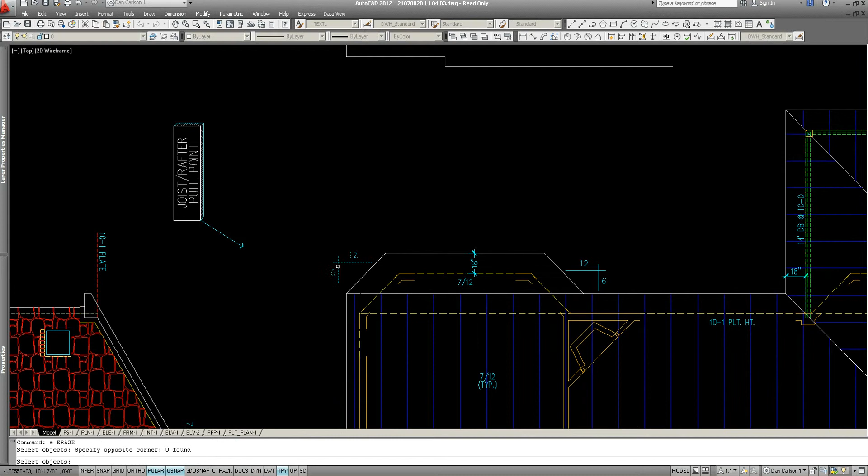And we've got a 7/12. Now I'll just give you a heads up - if you make all of the other slopes on this also a 7 and 12, it'll make it a little easier because all the lines will just be 45-degree angles. And since we get to pick how we want that to be, that's what I would do.

So here's how I would do this roof. What I would do is just take this and extend it out like this, and then we're going to pretend that instead of a bay, we actually have just a regular hip roof that's coming off the back here, and that is the shape of it right there.

And what we're going to do is just take our roof - now we know this is a gable, and that's why this overhang is 12 inches, but this right here is an overhang that is 18 inches.

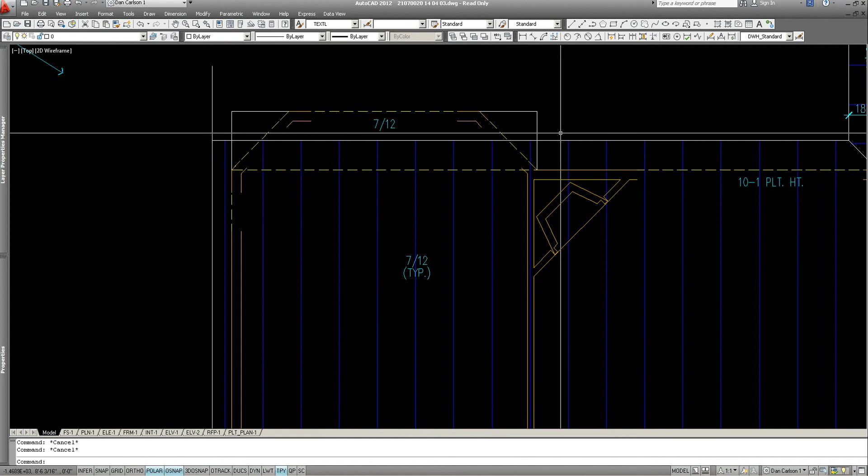So we need to make these 18 inches. I know that sounds kind of weird because this is only 12, but just go with me here for a second. So we're going to take these and offset them 18 inches - 18, 18, and 18, and then just do a fillet.

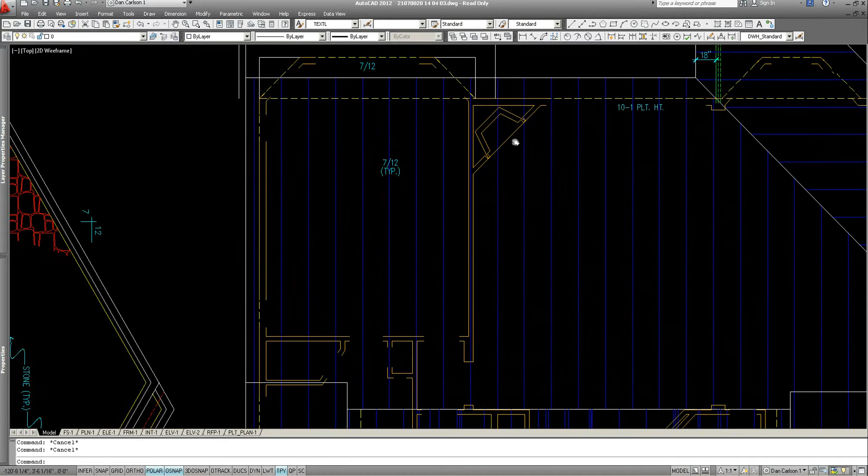Fillet. I'm wondering if you put this hatch in, but it's got to be erased anyway because it's not lining up with our joist and rafter pull point.

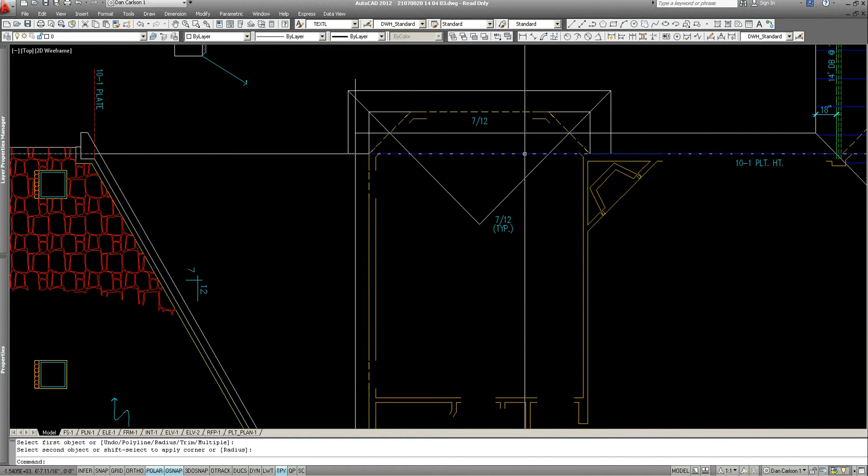Alright, so we have this, this, and this, and then even though we're going to end up with a bay window, we're still going to just go ahead and draw this as if it was just a hip roof, and then we will modify that later. And since again we said that we were going to do all of them at 7 and 12 pitches, then we just come down here like this, and then erase these, copy this to down here.

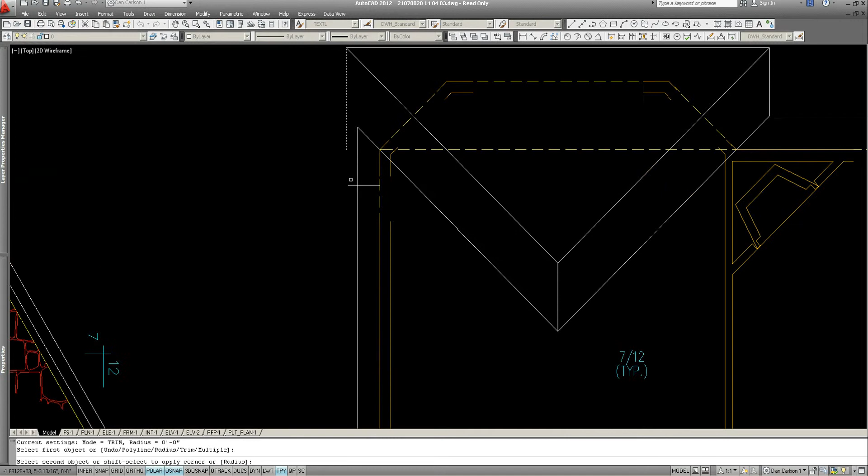Alright, and then we've got this strange thing here, and this becomes one of these little zigzag roofs that we talk about every once in a while, where this roof will come and butt in somewhere down here. This will make a little bit more sense once the exterior elevation is drawn. But in the event that we were doing a regular hip roof, this is exactly what it would look like right here.

Now, once you have that principle in place, then you know that this little spot here in the middle, its location is fixed, and these hips and valleys are also fixed. So if we want to turn this into a true bay window roof, then we take these and offset them 18 inches. I'm going to just draw a line 18.

And then mirror this over here. And then we end up with this kind of a funky thing going on, and before you start trimming out too much stuff, we have to figure out where these are all going to merge.

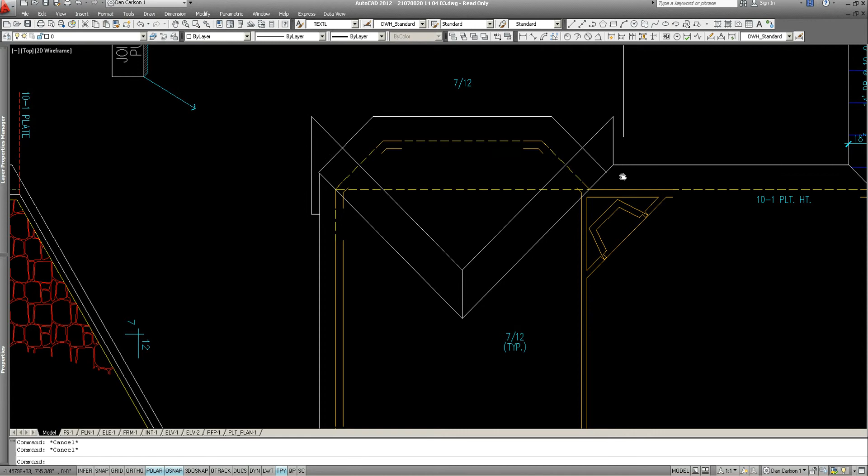So we know that these are going to merge right here. We know that, even though this doesn't line up. I get rid of all this extra stuff. And this is going to come right here, like this.

Now this would be a funky roof if we left it just like that. So what we have to do - there's two ways that you can do a bay window roof. One is just to take this all the way here. This is the most common way, and mirror that.

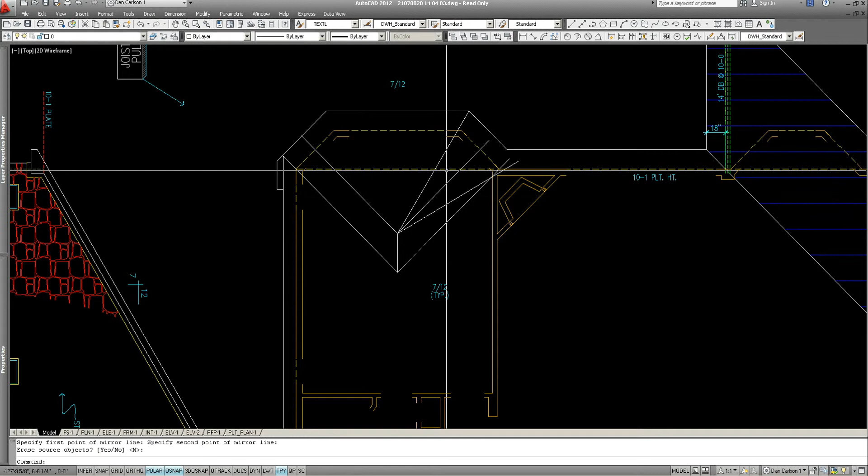This will be a 7/12, this will be a 7/12, but this will be something different. You could figure it out by figuring out your rise and run. This run here is 9'6". This run here is 10'8". So that means this will probably be something like a 6 and 12 pitch because it's less steep than this one, but that doesn't matter.

And then these two combine here, and then these end up connecting, like that.

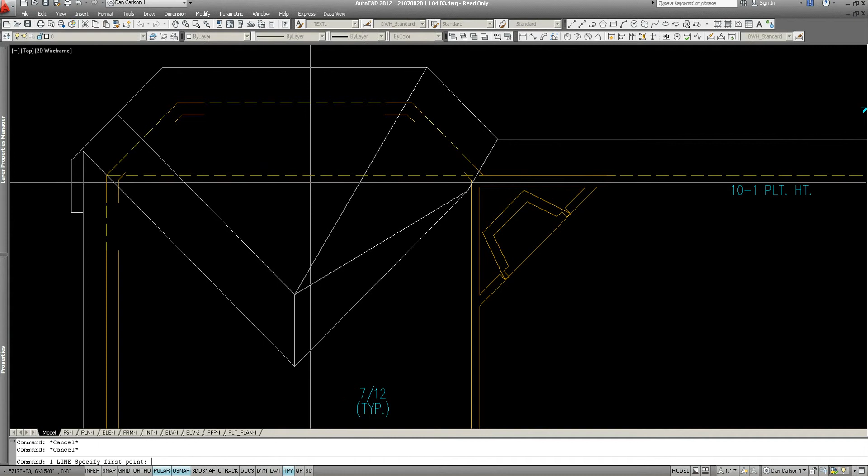You know that these two slopes should be the same, these angles, because this is a roof sloping down this way, like this, and this is a roof - whoops, I forgot the arrow - and this is a roof sloping down the same way. So these two lines are doing the exact same thing. That's why you know it worked, because even though I didn't copy the lines over, they end up being the same angle.

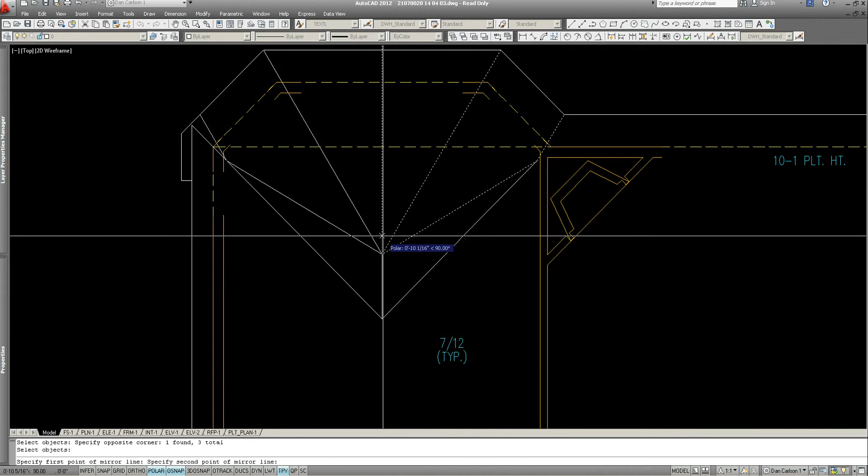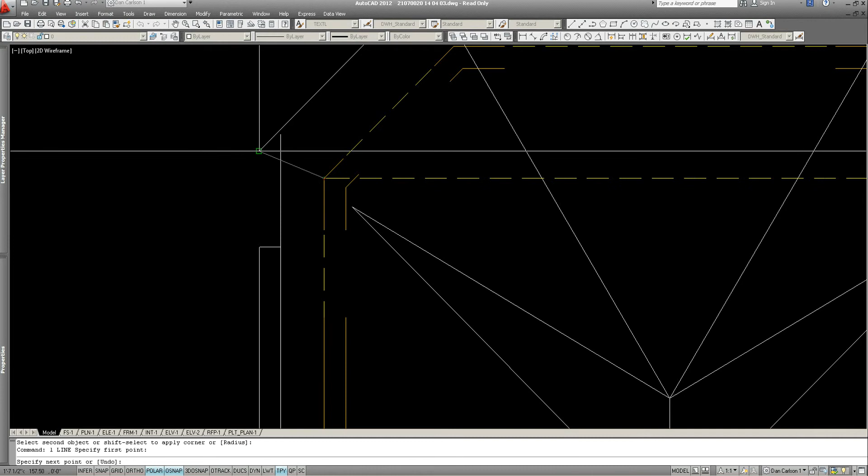Then you can just take what you've done over here and do this. The only difference being that we don't have the same little corner over here as we do on the other side. So let's see here - this would end up connect this to this, and let me think about this just for a second.

Okay, so I figured this out while I was thinking there. The reason why this matches this is because this is sloping this way, and this is sloping the same direction. But this is going to be a little bit different, because there's an area here where it wraps around. This little piece of roof here is actually sloping down this way.

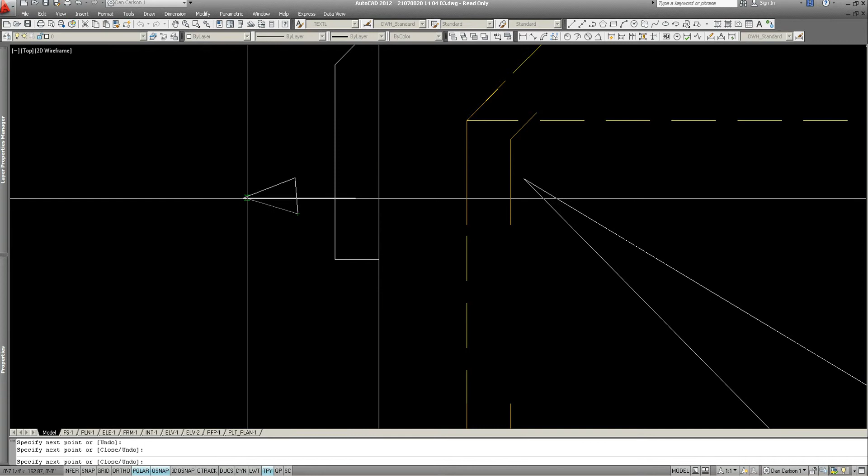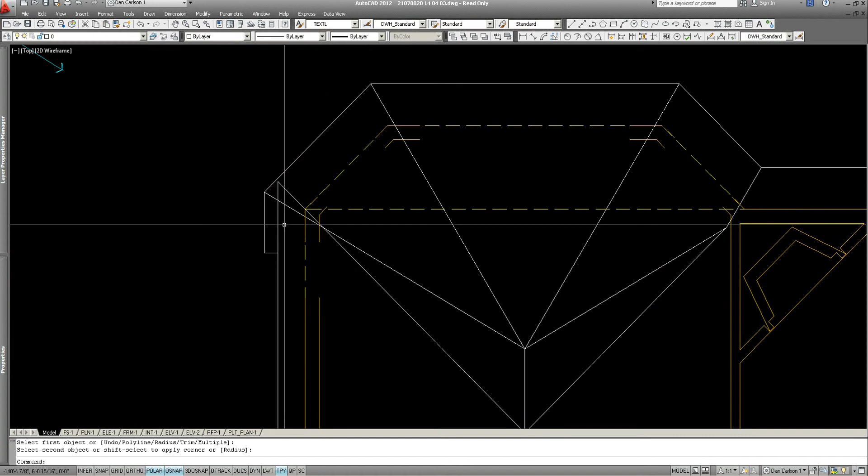That's the direction of this little roof here. So the way we figure that out is we just take this roof and mirror it at a 45. You can see how it actually ends up lining up directly with this. Then this piece of roof here technically hits this here, which gets kind of weird.

What we're going to have to do here is draw this from the side, because I'm afraid this roof is going to be too high and we'll never catch up to this roof. In other words, it'll never touch it. So we need to go over to the side elevation.

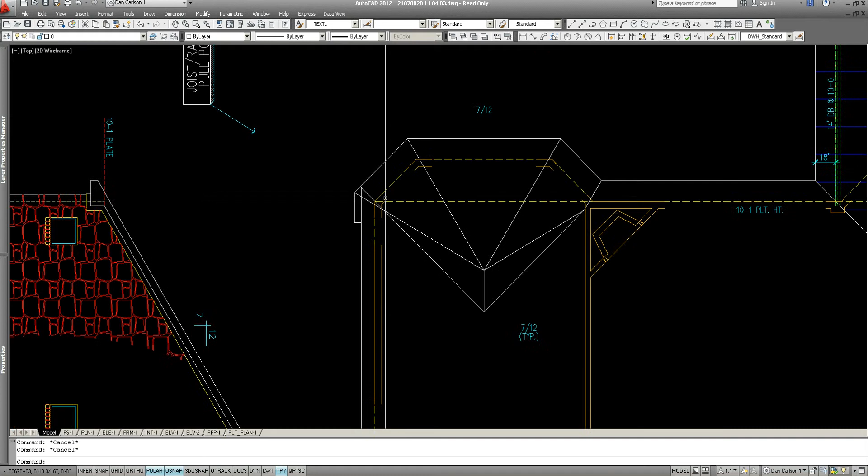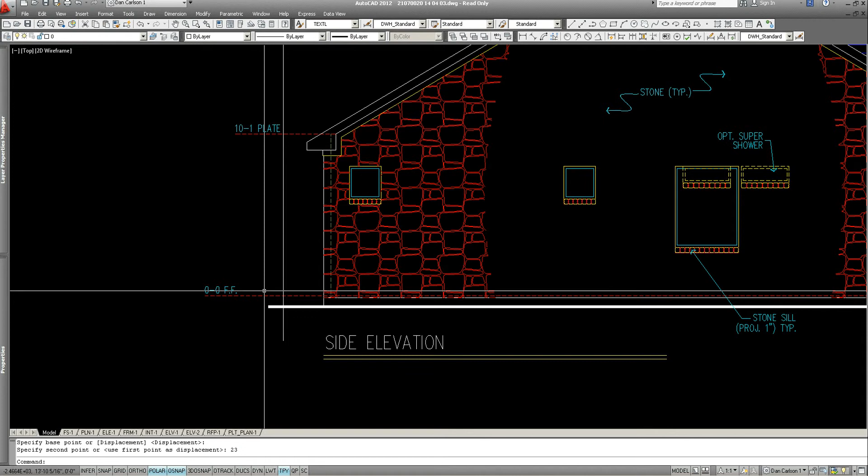So if I take this roof and spin it this way, now we've got, you can tell that this overhang lines up there, okay? And if we just draw the bay over here, and we know that this fascia board here is going to be the same height as this fascia board

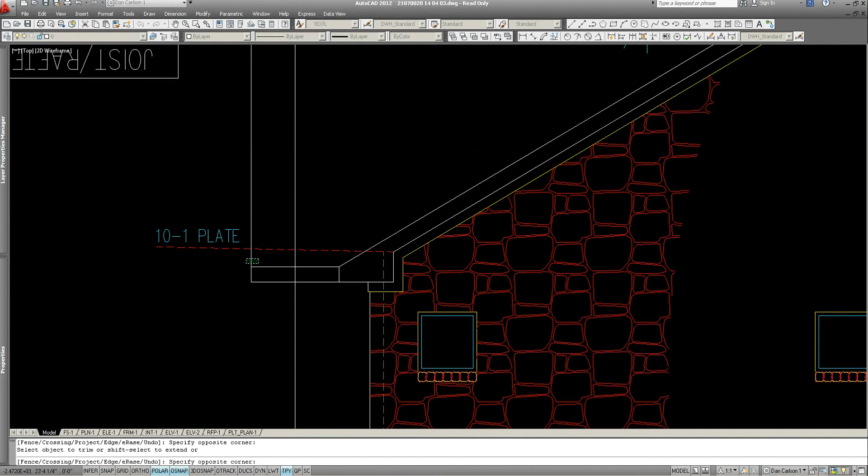here, because that was a part of the reason we left it at a 7 and 12, so that everything would line up. And then we know that this, when I draw this line, that of course is this slope here, which is actually representative of this face of the roof right here. And then it comes over here and here.

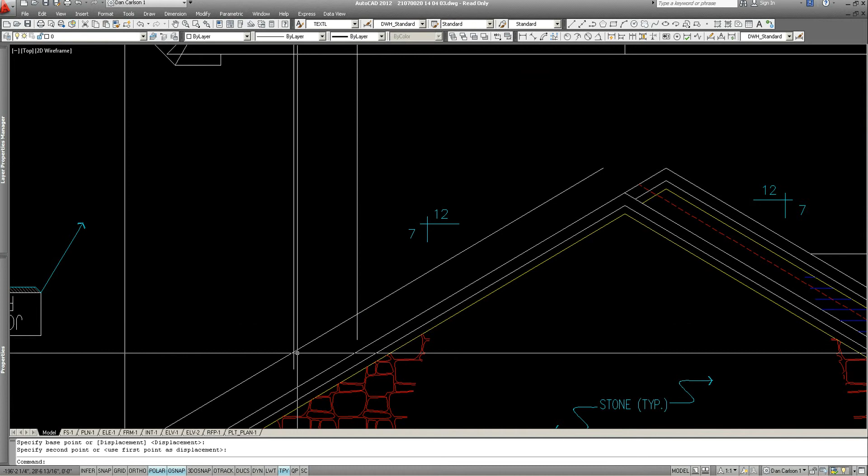And those should line up just like that. If it didn't, we would have been doing something wrong. And then this ends up hitting right here, like that.

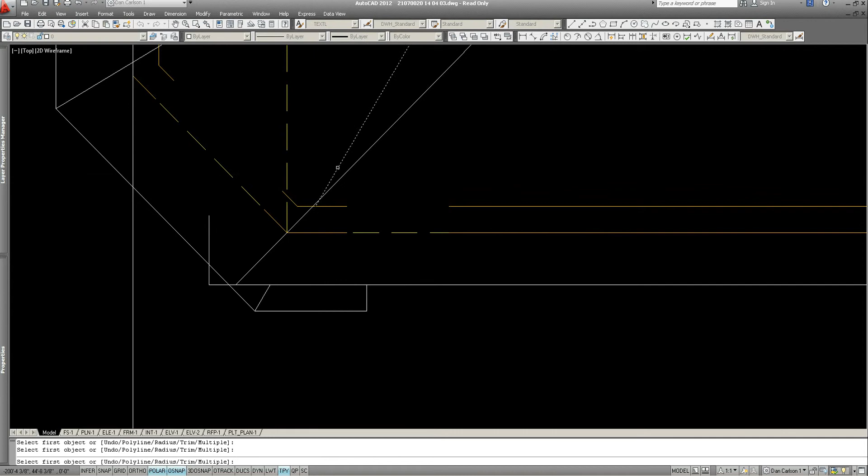And I think really this is what it's going to end up looking like. Oh yeah, sure, we have to actually bring this fascia board all the way out to here. That's what's going on, like this. And then there's going to be a point, I think it's going to line up with this same angle, like this. Yeah, there it is.

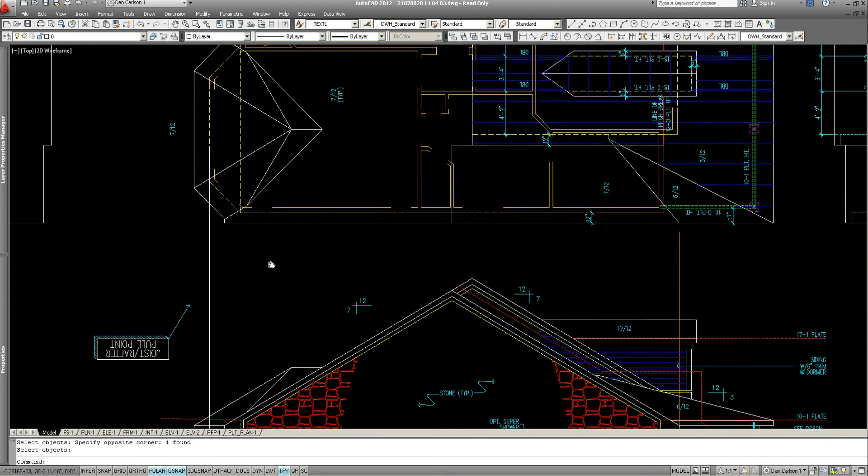There's our roof. Okay, so that is, oddly enough, exactly what the roof is going to look like. And we do not need this roof here at all. I should have probably pointed that out from the beginning.

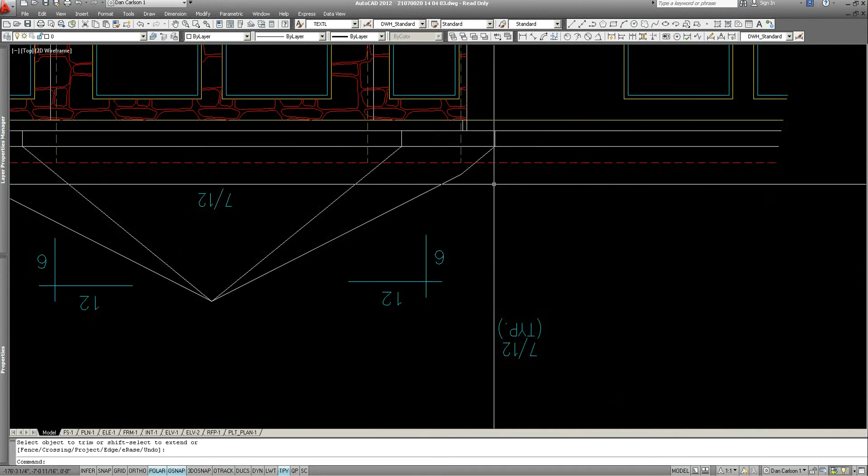I made it way more complicated than it needed to be. So rotating it back to the way it was a minute ago, you can see that this little fascia over here just lines up with this fascia over here, and we have the bay sitting in it. The rest should be fairly simple and follow suit if you just use this in creating your back bay window. You can see that this little weird notch here should end up lining up with these. They don't in this situation, but in reality they would.

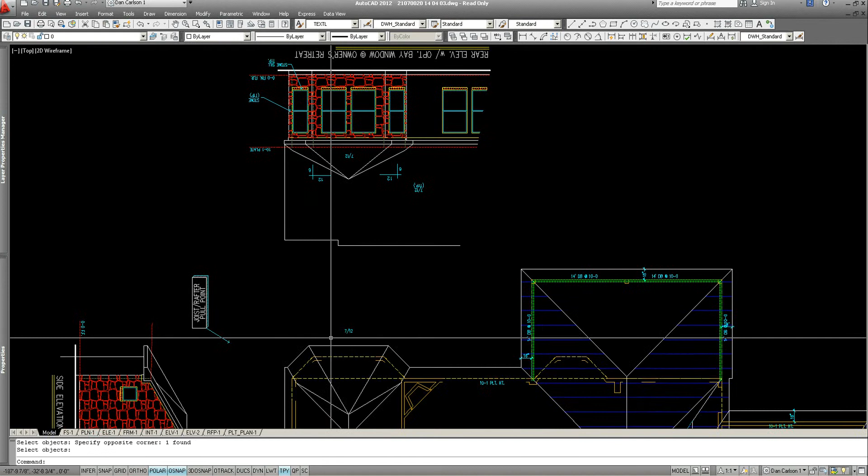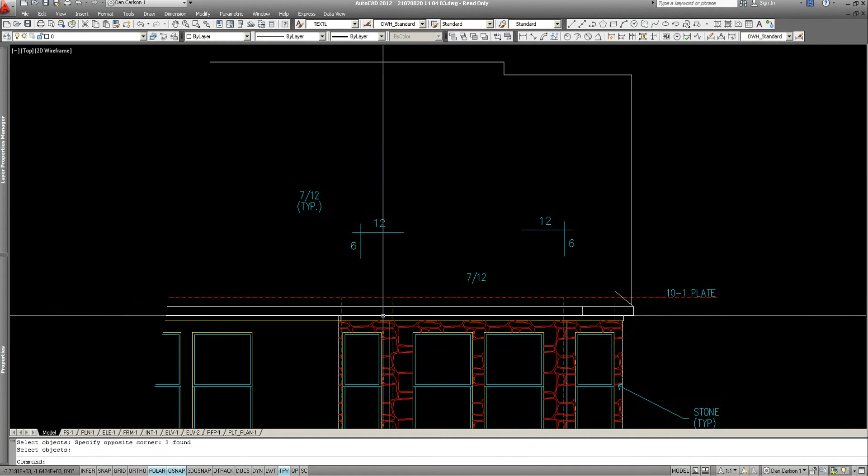Just for kicks, let's just rotate the whole thing around so we can look at it straight on. Sometimes I just want to erase everything because it's faster. It should be 12 inches, and it is.

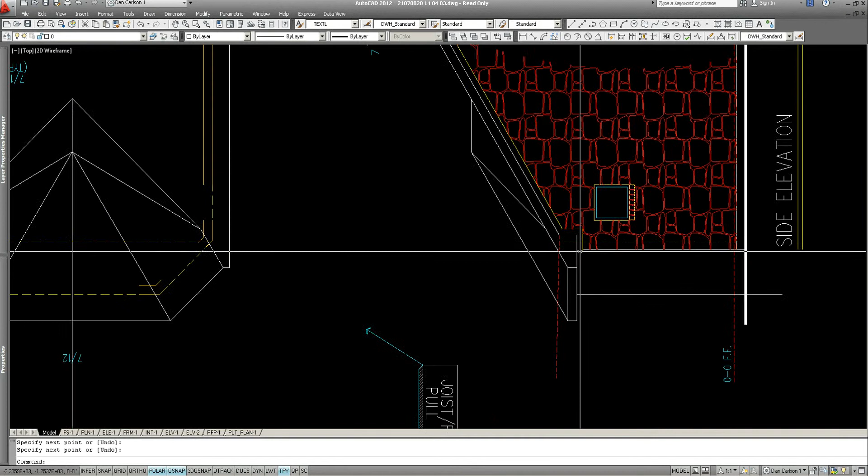Alright, so we know that the center point is right here. And we also know that if we were to measure the distance between the peak and the top fascia, it is 5 foot 6.5 inches. So we just go from this point here, top fascia, 5 foot 6.5, enter, and that is the top of our roof.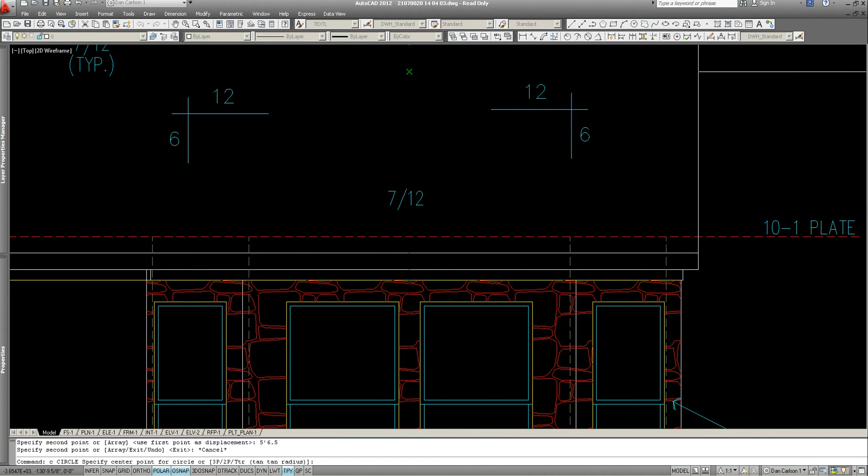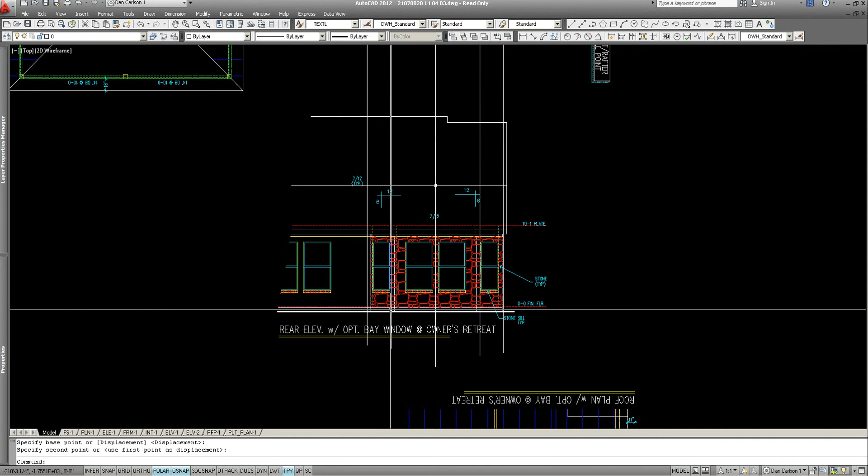Okay, when we do all this work, then we just come down here and we make lines to where our corners are on the fascia, like this and this, and then we pull that down, and trim all those off. These are corners in the fascia, and all we have to do is connect these two to this point.

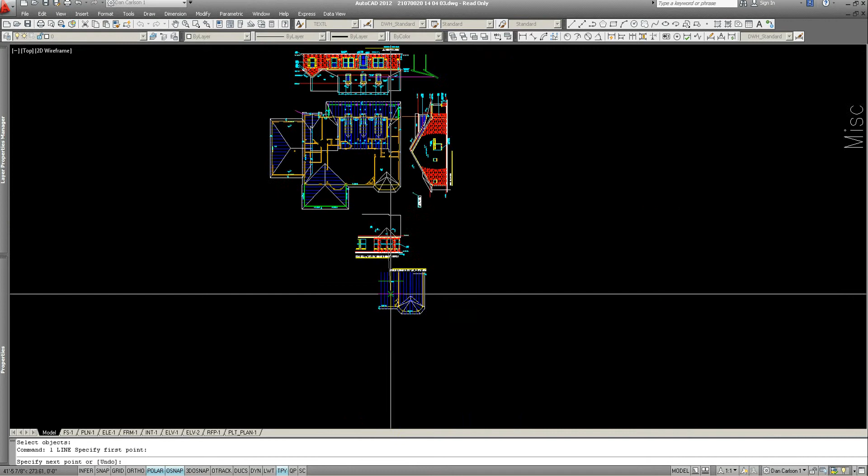Okay, that was the easy one. Then these, you would sometimes think that they would go straight down, but they don't. If you look carefully, you can see there's a little jog. And where those jogs are... where did it go? Oh, wrong roof. This right here.

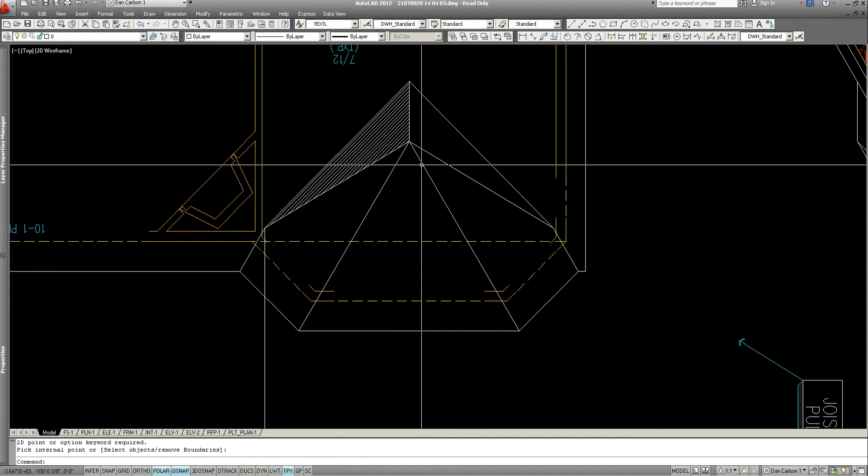We know that this face here, this face of the roof is represented by this line, and we know it's a 7 and 12 pitch. So we go 12, 7, close. And these are all going to change to 7 and 12. I could also do an example of a 6 and 12 roof. It just makes it a little bit more math, but it's the same concept.

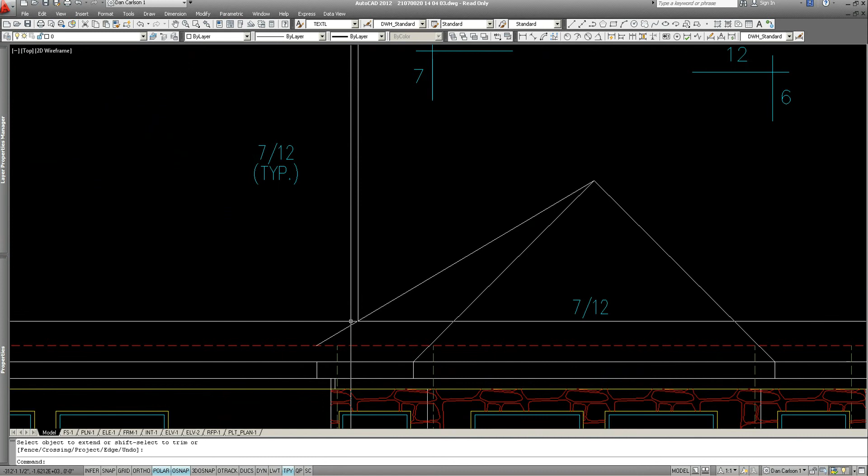Okay, so there's that, and then we take from here and connect. There's like a little bit of a jog right there, and that's normal. This should match on the right side, and there it does. That's what it's going to look like from the back.